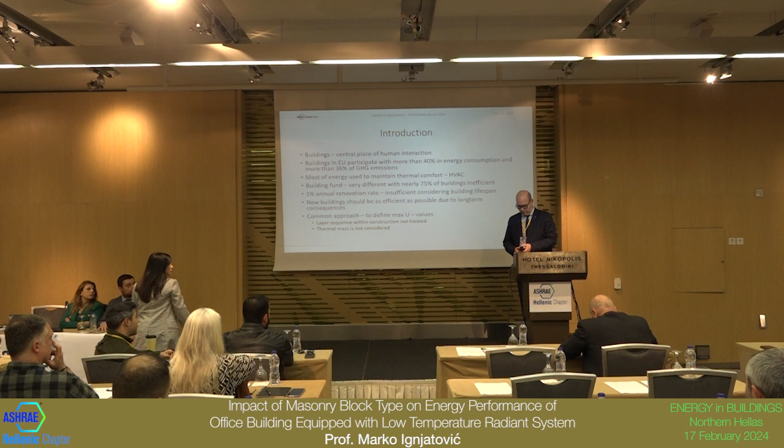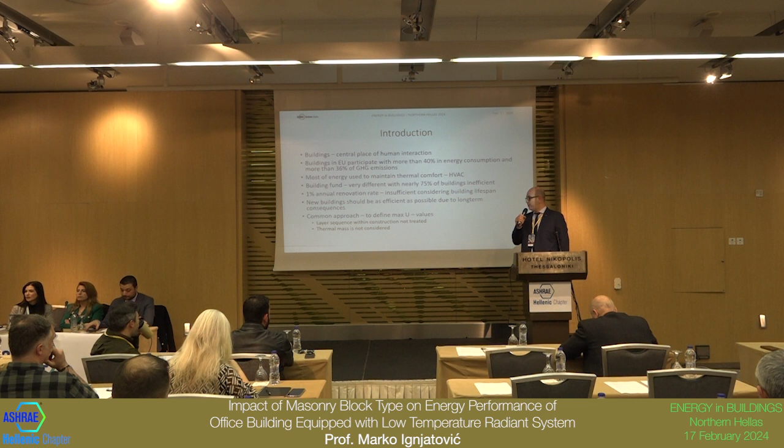We all know that buildings are central place of most human activities, whether we live, work, or do our conferences and other things. We spend most of time indoors. And in order to separate us from outside conditions, we must use energy, and most of this energy is used in our HVAC systems. These are the data we had from EU level.

In Serbia, the things are even worse, because according to our energy balance, more than 50% of final energy in Serbia is used in residential buildings, and also a lot of this energy is fossil fuel based, whether electricity or natural gas or some other fossil fuel.

Considering building fund, there is a general conclusion that in Europe, on average, 3 out of 4 buildings are inefficient or underperforming, according to some national legislations. And also, with all the strategies involving building renovation, deep renovation, etc., on government or local level, there is only 1% of annual renovation rate considering whole building stock, and turnover rate is less than 1%.

So basically, if we stop constructing buildings, only in 100 years, considering today's tempo, we can refurbish all the buildings, and we know about the building life cycle and how much more energy is needed in this time period. So when we construct new buildings, we must take long-term impact, because they will remain for many years after they are built.

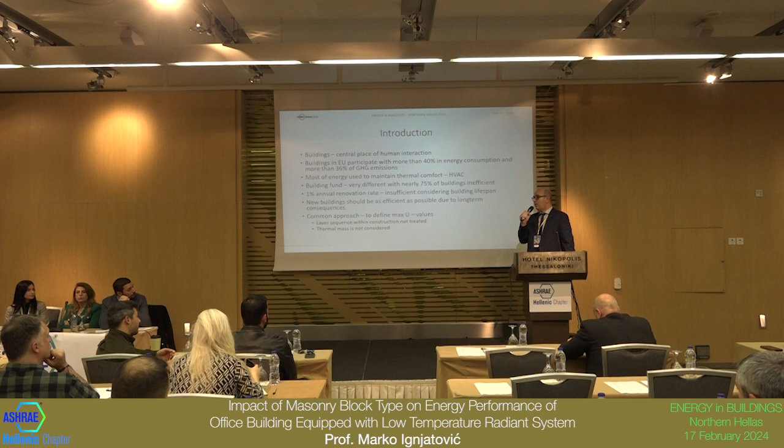In Serbia, as in most of Europe, we have a common approach. The basic one is to define maximum U values of building envelope parts. In this case, we do not consider layer sequence. It's the same however you put your layers on, and we do not consider thermal mass. Why is this property important? Because all the materials used in construction and within building can store and release heat. And if we know how to store and release, we can achieve some additional energy savings.

And considering this thermal mass, we all know we have heavy mass buildings or low mass buildings. They have all their advantages and disadvantages. And using higher thermal mass can shift peak loads during summer towards colder parts of the day, during night. In cold climates, it's basically the same, but there are some studies that show that this is not always the case. So basically you can increase energy consumption with higher thermal mass if you put intermittent operation on heating system, for example, which is the case in Serbia.

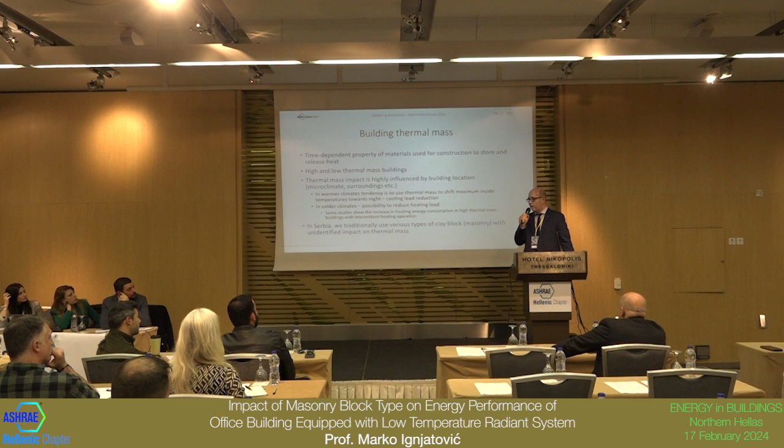One of my colleagues 10 years ago published an article considering impact of thermal mass on peak load, whether cooling or heating load, and he showed that not in all cases you can reduce peak loads with heavier buildings. So basically you should take into consideration the particular building each time.

In Serbia, we traditionally use clay blocks to build our buildings, especially residential buildings, single or multi-family. And we don't treat thermal mass at all, although when I speak with architects, they know all the advantages of using thermal mass, whether it's a Trombe wall or increased thermal mass on the outside, but we cannot calculate it.

Like I said, when we treat U value, we have only steady state conditions. We have outside design conditions, inside design conditions. We do one calculation at one point in Serbia. And we completely disregard thermal inertia, which can be described with these two parameters. The first one is time lag, and the other one is decrement factor.

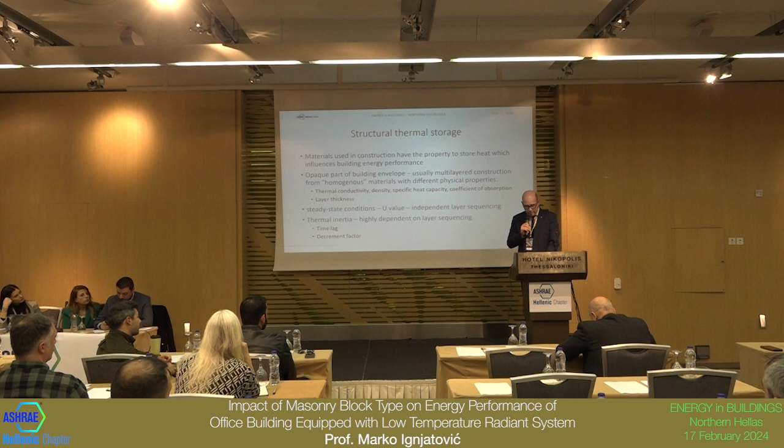Time lag or dephasing shows the time needed to propagate heat flux from outside surface of the wall towards inside. And decrement factor shows you the ratio between maximum and minimum surface temperatures on inside versus outside.

In literature, there are various definitions of time lag. But the most common approach is that you look only into 24-hour period, and you identify times when there is peak inside surface temperature and peak outside surface temperature, and according to these classifications, you can calculate time lag. So it can be more than 24 hours or less.

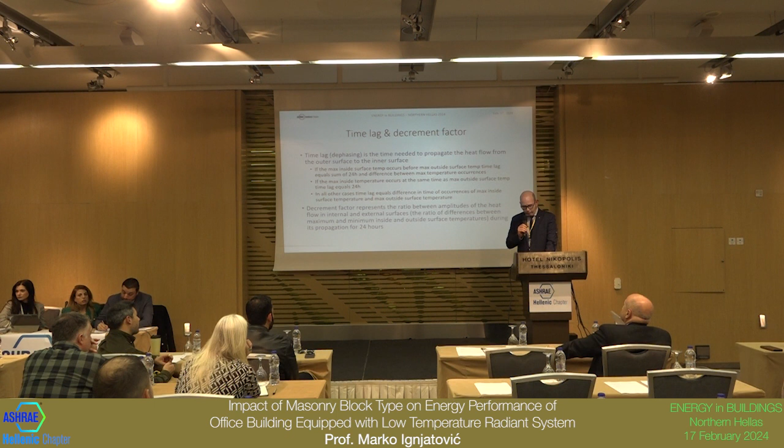So the basic idea of this study was to calculate the potential impact the increased mass on the inside surface of the building could have on energy performance. In order to do that, with my colleague who applied for patent for this increased mass block, we developed a two-way study. One was to focus on these dynamic properties, time lag and decrement factor, and the other was to compare this hypothetical new block with commercially available blocks on this office building in Niš.

Most of you heard of Niš. I don't know how many of you visited. Niš is the third largest city in Serbia. It's in the southern part, 4 hours drive from Thessaloniki towards Belgrade. And it has a climate which is a bit strange compared to the literature-based ones. You have extremes of 44.2 in the summer and minus 23.4.

I remember this summer extreme. It's an official meteorological recording. It was in 2007, and on various city sites, due to heat island effect, it was more than plus 50, and all the chillers or heat pumps which were in operation were cut off during this peak temperature.

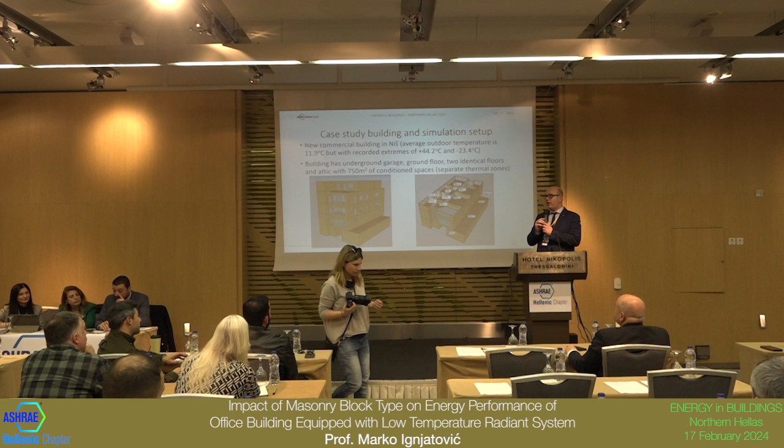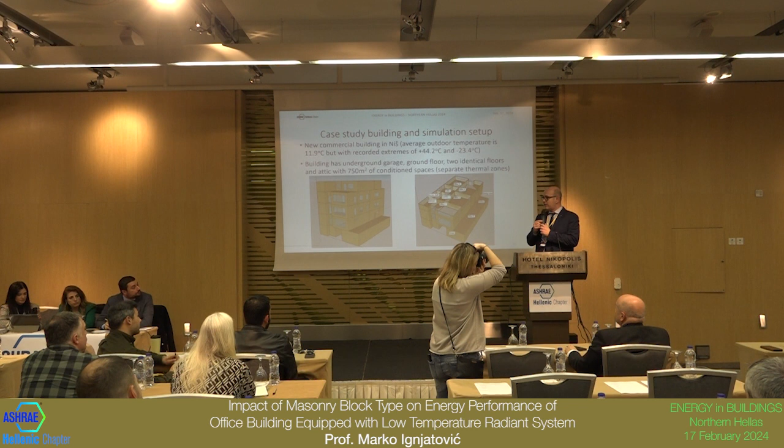One comparison, for example, with Thessaloniki, on 20-year average, if you put outside temperatures within pre-specified temperature bins, and you compare how this relates to outside design conditions. For example, in Niš, the outside winter design condition is -14, and on average we have only 10 hours below this temperature. But during summer operation, we have +35 outside design condition, and we have more than 200 hours per year on average above this temperature. And I must say, all systems within the Niš area are designed towards these two outside conditions.

And what is the paradox? Besides commercial and public sector, in residential sector, you don't have cooling on your priority list at all. Because it's easier to build, we must follow our legislation considering only heating period, and then we put split air conditioners everywhere. So it's a bit strange, but this is the effect.

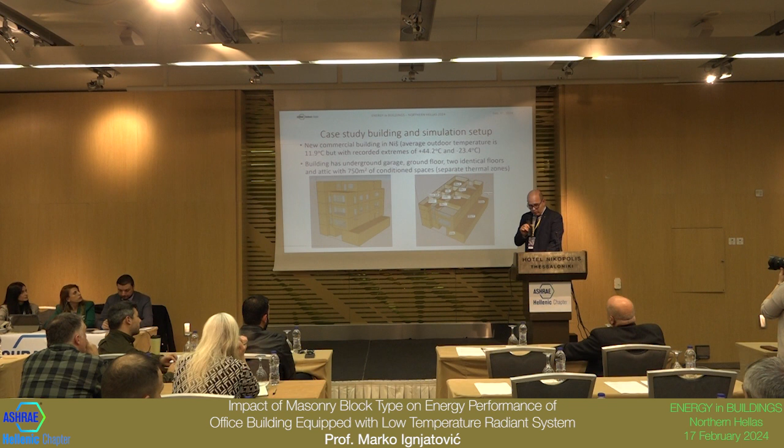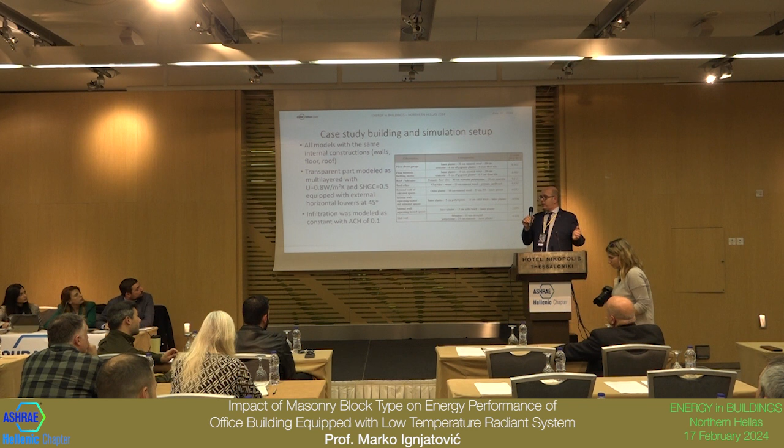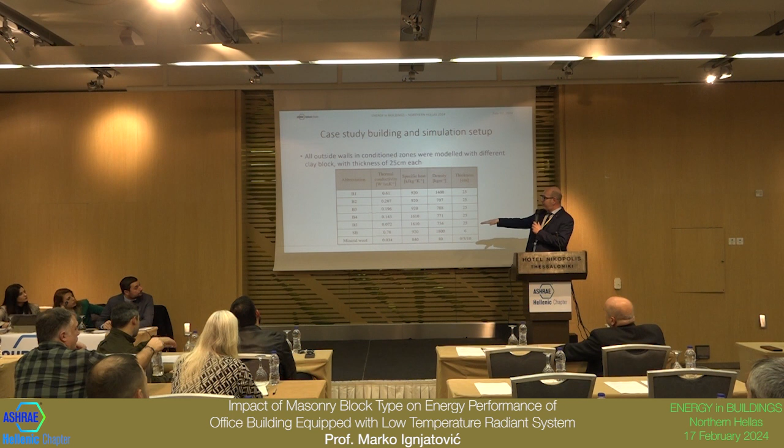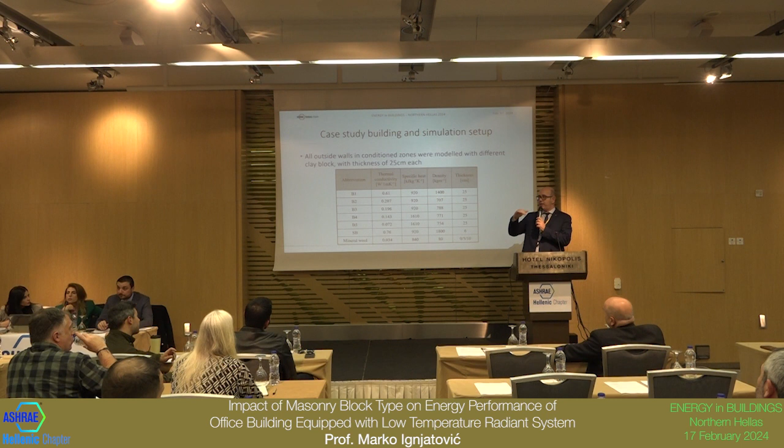So in order to calculate time lag and decrement factor, we used this building with defined building envelope thermal properties, and we did a twofold study. So basically we took 5 commercially available blocks in Serbia. They're all with the same thickness of 25 centimeters each, and then we created a hybrid because we took 19 centimeters of the best block. We said, okay, we will scale it down, put it in the wall, and we will add 6 centimeters solid brick on the inside, and see what happens.

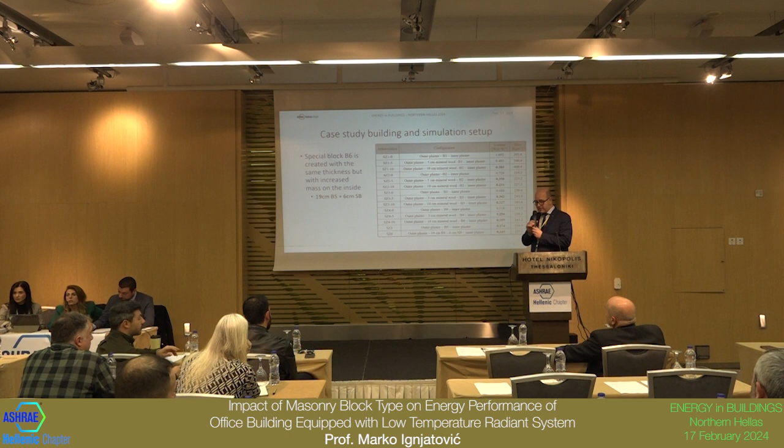In order to do so, we developed 14 different scenarios, or even more. We used these commercially available blocks. We put them everywhere around the envelope, and then we added insulation, which is the common practice in Serbia. The bold values are below what is minimum defined by our national legislation. So, for example, a lot of these, which were built 20 or 30 years ago, do not fall within the energy efficiency requirements now active. So our block with no insulation has a U value that can satisfy our national requirements.

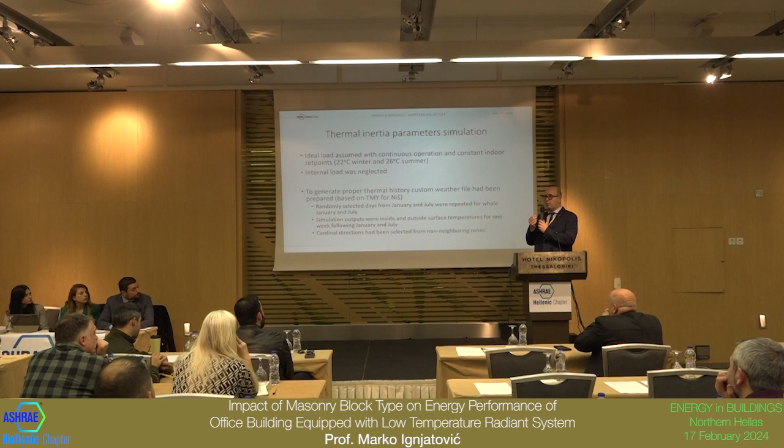So for decrement and time lag calculation, we put ideal load conditions. We put constant heating and cooling set point indoors, and we neglected all internal loads in order to have the net influence of this increased block. I must say that this is not a standardized procedure. There is a special ISO standard covering these thermal inertia parameters, but we wanted to check how we can use energy performance simulation to calculate these parameters for a typical building, its orientation and surroundings, because everything you need you can generate as outputs from simulations.

We prepared a custom weather file for the city of Niš. So basically we took a random day in January and July. We created artificial January and July with each of these days repeating one after another, and then ran the simulation for the following week. And all the data given here are averages.

This is the first part of the study. In the second part, we wanted to check commercially available blocks with added insulation and this new type of block to see how it affects the energy performance of the building given on the previous slide. On this table, you see there are only six wall types. They have similar U values. Our new block has the highest, or let's say the worst, U value for the experiment.

And we developed two demand-side systems. One is a variable flow floor heating system. The other is a traditional fan coil system. They have priority switching between seasons. So basically, during winter, only floor panels have the primary effect, and during summer, fan coils are primary during occupied hours, and floor panels are used in unoccupied hours.

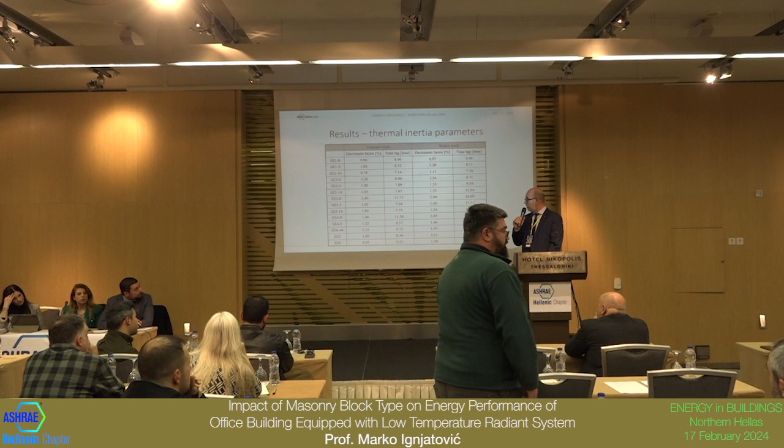These are the results of the first part of the study. In this table, for all the different wall configurations, we calculated the average decrement factor and time lag for a summer and a winter week. We see that our new hypothetical block has values that coincide with the values of other commercially available blocks. If we plot it against the specific mass of the wall, we see the values correlate well.

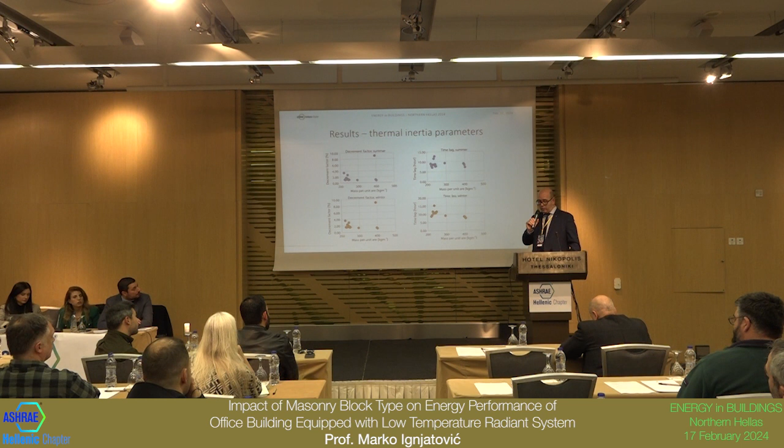But what is most important is the following. These are averages for a week without considering orientation. When we look into orientation, we see the same values averaged over a 7-day period, but with different cardinal orientations. So we see that during summer and winter there is a strong influence on the northern orientation, and then it is pretty much the same for the other three cardinal directions.

Why is this important? I'm a mechanical engineer, my faculty shares the building with the faculty of architecture, and I collaborate with a lot of architects. And when we discuss, they say, look, we can make buildings with different walls. It's important that outside they look the same visually. So if you show us that we can put something on the north which is better considering energy efficiency, we can do it. They don't have boundaries considering this influence. They will put what they think is the best solution for this building.

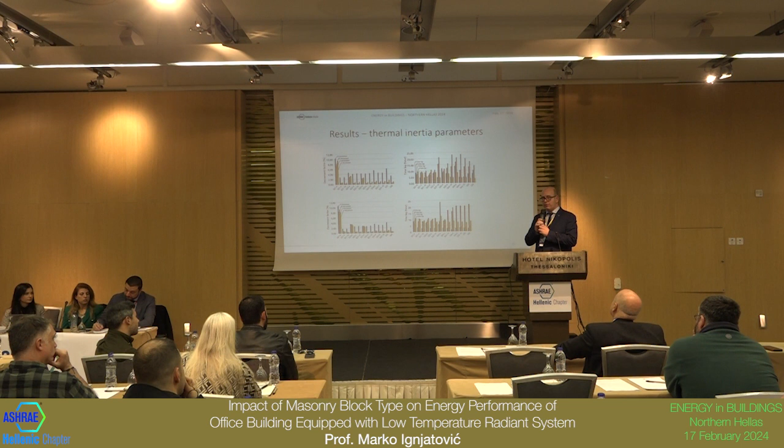Considering energy performance, with all the simulation setup described earlier, we took 6 wall configurations, and we used as a base case the wall with the smallest U value. It's wall W4, and we see that, for instance, our wall W6 with increased mass has significant savings in energy consumption for heating operation, which is most important in Serbia at the moment. It can lead up to 4%, actually it's a 3.65% decrease.

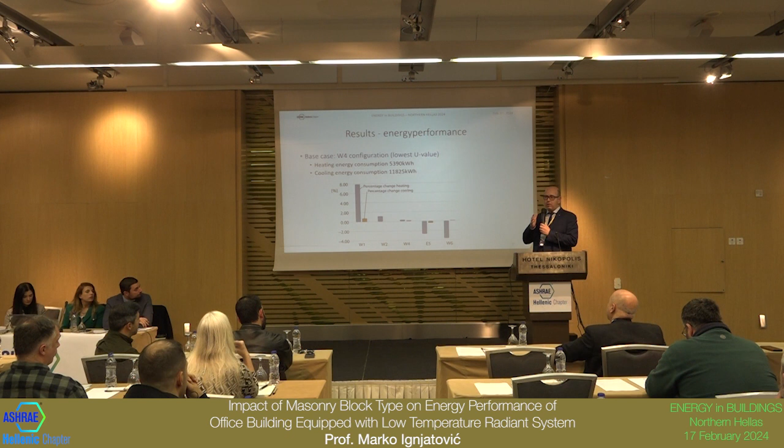In this part of the study, we didn't focus on summer conditions because this block was intended for residential buildings, especially single-family or two- or three-family buildings, not for high-rise buildings.

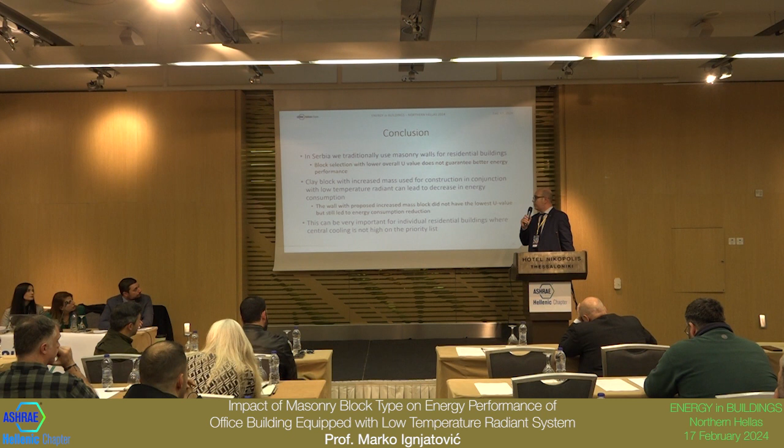At the end, to repeat, we traditionally use blocks when we build our houses. We can make more energy savings by increased thermal mass on the inside. In this study, we didn't focus on wall radiant systems, which can prove even more efficient. We focused only on what was built inside this commercial building, which has been in operation for 2 or 3 months. What is most important, although we didn't have the lowest U value, we still managed to have some energy savings, which are, I repeat, for Serbia, currently only focused on the heating period, unfortunately.

This block type is no longer hypothetical because my colleague, Goran Vučković, applied for the patent. I believe it's approved by our patent office. And he also managed to make a contract to create several prototypes in order to test mechanical properties, and then we will test the thermal properties of this proposed block type, because we had satisfying results in this, how to say, numerical experiment.

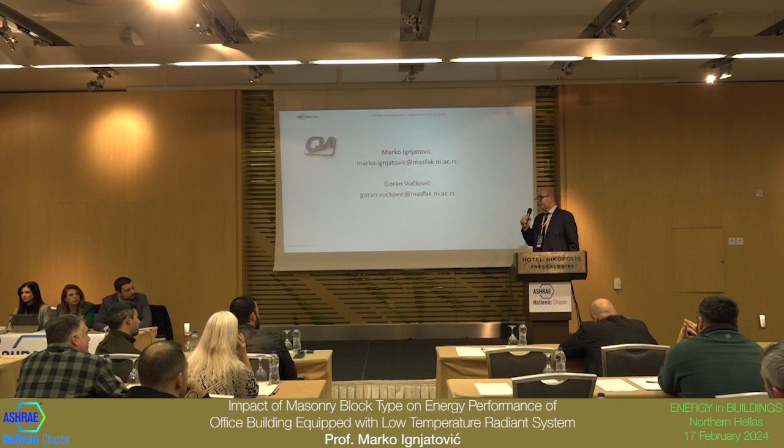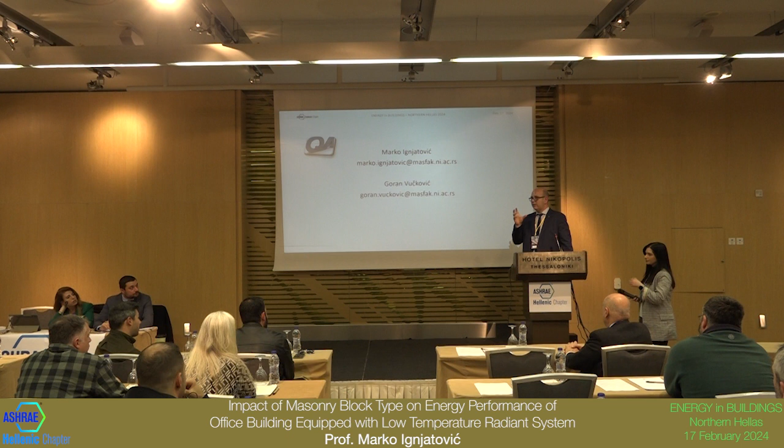Thank you for your presentation, Professor. I would like to ask you if you found any correlations among decrement factors, thermal lag, and the HVAC sizing. No. We put the building itself as an initial idea, and all the models were very well insulated, and all the U values you saw on the tables are far less than the minimum requirement, if the investors wish.

So basically, we have enough floor area to put a radiant system, and it can maintain indoor temperature. I looked at several cases to see how this peak load compares. I didn't show it here, we didn't publish it. It was maybe in the range of plus minus 5% on average. It's no big deal. It doesn't influence peak load, if this was your question.